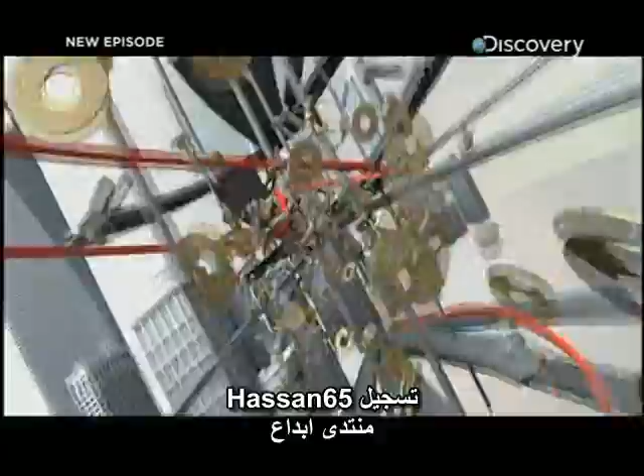In Singapore, a tiny island nation with less than 5 million residents. In fact, the entire country is smaller than all of New York City. Located at the southern tip of the Malay Peninsula in Southeast Asia, the main island of Singapore is both a city and a country, one of the most densely populated in the world.

With no natural resources of its own, Singapore is risking $5.5 billion in hopes of cashing in on the gambling boom exploding across Asia. It's a pretty significant gamble because for Singapore, we've never had gaming before at this scale. We've never had a resort at this scale. Yes. You're taking a kind of a major leap. Yes, it's certainly a transformational project for Singapore. Where you hope to actually not just double, but triple the tourism receipts. That's big.

The centerpiece of this giant transformation, the Marina Bay Sands. One of the biggest and most expensive casino complexes in the world. Unlike any hotel and casino ever built. Rather than just being kind of a traditional hotel and casino that we might find in Vegas, instead, we have a museum, you have theaters, you have retail, you have a casino, massive convention center, 3 incredible hotels, and all of that capped by the first ever Sky Park. That is absolutely right. The Sky Park on the very top will become the icon of Singapore, we think.

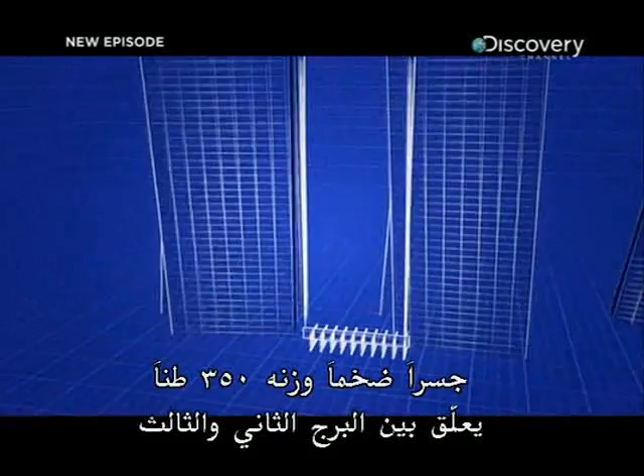The biggest challenge for builders, lifting 7,000 tons of steel, which is more than the main span of the Brooklyn Bridge, on top of 3 650-foot-tall buildings. To get it up there, the team divided the structure into 14 large but more manageable segments. 6 form the bridges connecting the towers, and the other 8 make up the observation deck, which sticks out 218 feet from the end. And right now, crews are about to lift the second-to-last bridge segment, a massive 350-ton piece that will hang between towers 2 and 3.

It's a little after 7 p.m., and on most job sites, it'd be quitting time, right? Folks would be going home. But here in Singapore, we're about to begin one of the most critical lifts in the entire project. That bridge segment right there, an over 350-ton chunk of steel, is about to get lifted up over 650 feet in the air.

In principle, this sounds crazy, right? Yes. We're actually taking a bridge, lifting it up, and putting it on top of 2 skyscrapers. Yes. This has never been done. Never done. So, you got to be a little bit nervous to get this thing up. Oh, definitely. Yeah. We have to get it right.

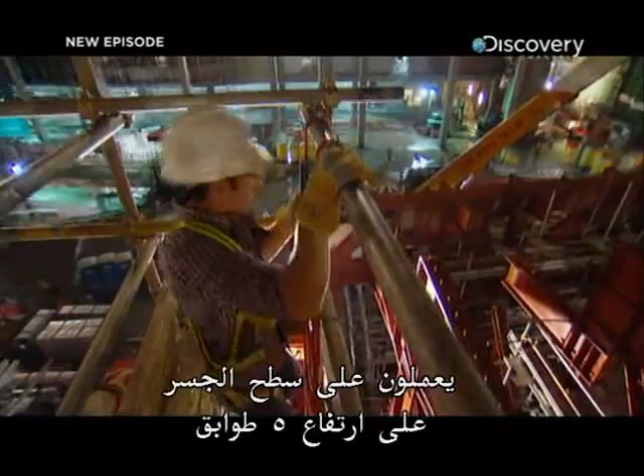Lifting this piece will take some of the strongest hoisting cables ever designed. Going up? All right, Solomon, up here? Yep. They get attached to the very top of the segment, 5 stories up. All right. And now, at long last, I'm on the top of the whole bridge segment, and you really get a sense of its length, because look at that. It spans all the way out between 2 full towers over 150 feet long.

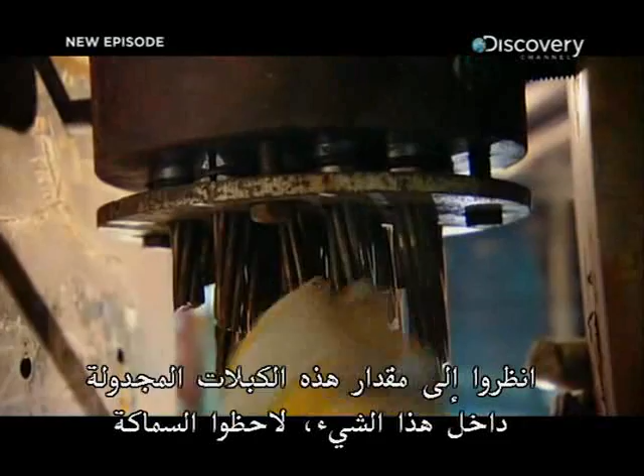And here, this is what it's all about. This is the shackle coming down over 600 feet up. And to really get that point, come here, check this out. Look at the amount of bound cables inside of this thing. Just the density. It's 2 of these shackles, one on this side, one on that side. We're gonna lift up over 350 tons of steel.

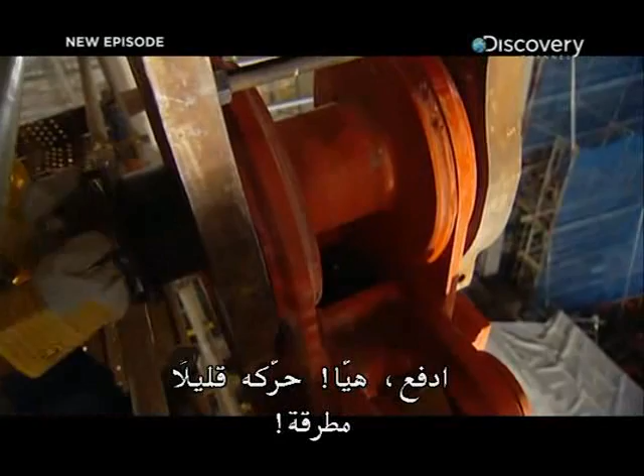All right, you call the man upstairs. An operator from the top of the Sky Park lowers the shackle down. Here she comes, here it is, here it is. Okay, 960 mm. It has to line up within 1/10 of an inch for this 150-pound anchor pin to fit through. Oh, no. Stuck. Push. Fight. Come on, shake it a little bit. Hammer. Give it to me, Poppy. You ready? Here I come.

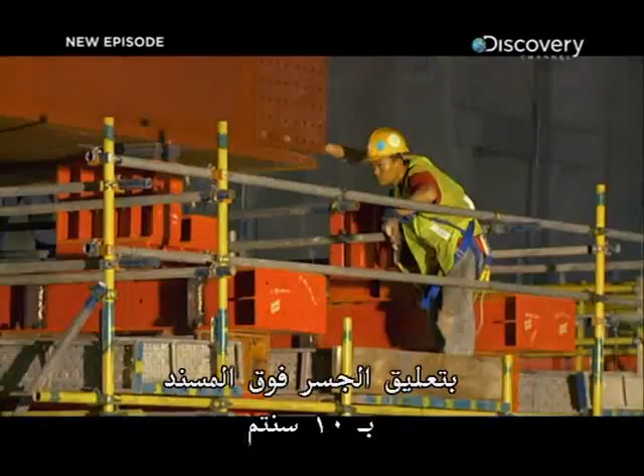Once the pins are pounded into place and the shackles are connected, there is one final step to make sure that the load is secure. Woo! Overnight, crews test the connections for 12 hours by hanging the segment just 4 inches above the support. If everything looks good, it is ready to go up.

Coming up, a one-of-a-kind solution to fight Singapore's intense sun puts up a fight of its own. Whoa. Hang on. I'm gonna pull you right outside of the basket.

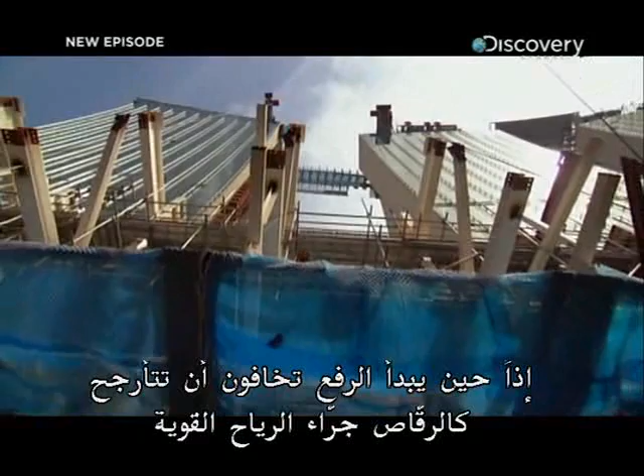Okay, Soliman, she's floating. Yes. 4 inches off the ground. Ready for the lift? Yes. How's the wind? If you can see, it is swinging. And if it swings, it might hit the building. So when the lift begins, the concern is in a strong wind, like a pendulum, it could move and actually hit the building. Yes. It's that close to the building? It is very close to the building.

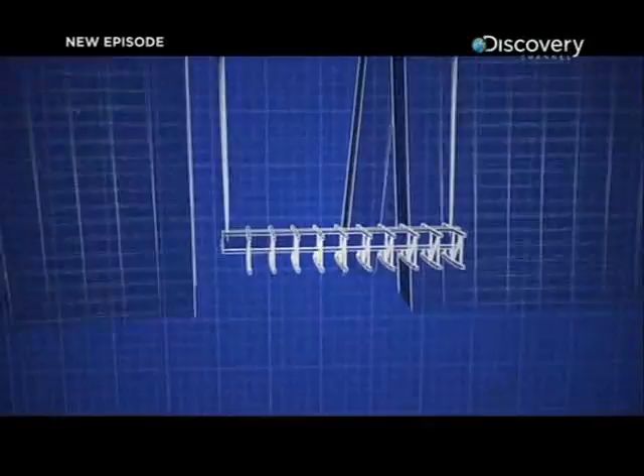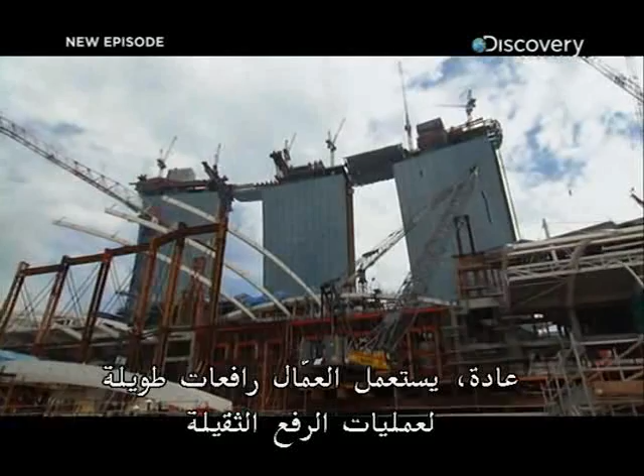Because of the curvature of the towers, this piece must pass within 10 feet of 2 glass skyscrapers on its way up. Any wind over 5 miles per hour is enough to call off the lift. So are we good? Are we ready? Yeah, good. So it's now okay to go. Okay. Typically, crews would use tower cranes for heavy lifts, but this segment far exceeds their capacity. So instead, engineers are borrowing the technology from a different kind of construction: bridge building.

Even the most powerful tower crane can lift about 20 tons. This thing weighs over 360, not an option. So they went with something called a strand jack. And to understand how it works, imagine 2 hands or clamps holding a rope. One hand locks the rope, the other brings the rope up, grabs the rope, goes back for more, brings up more rope, and so on and so forth.

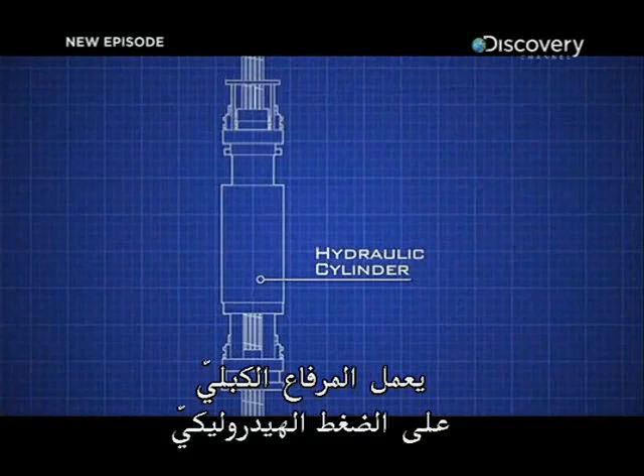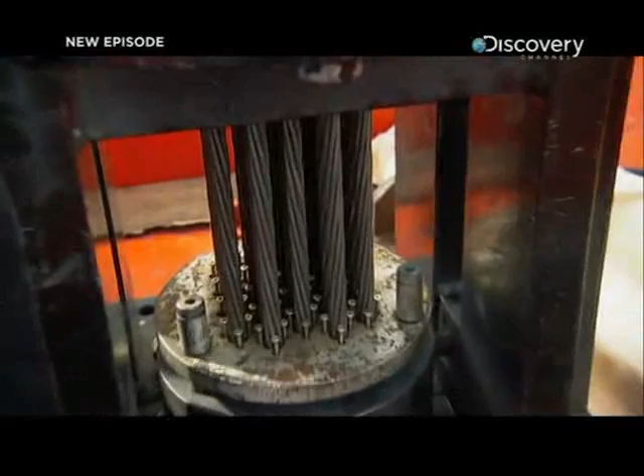Strand jacks work on simple hydraulics. A bundle of 22 half-inch diameter cables passes through 2 clamps. The top clamp grips the strands and moves up almost 2 feet. Then the bottom clamp locks the cables in place while the top moves back down for the next pull-up. It takes 2 enormous strand jacks to lift this segment, one on each tower. Combined, they could lift the Statue of Liberty. It's the first time that this technology has been used to make lifts this heavy from the top of a skyscraper.

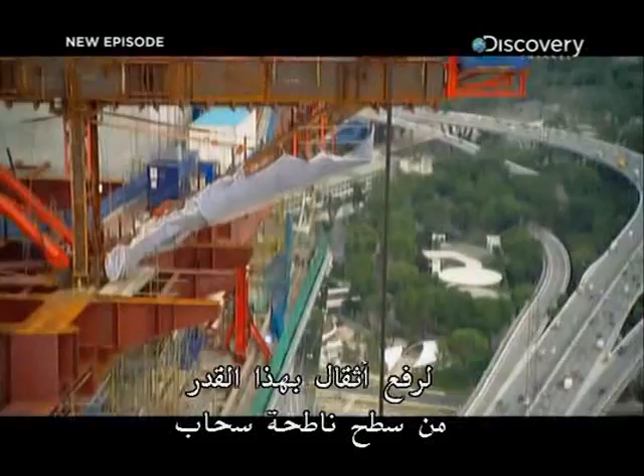Tony? Danny. Welcome, Danny. Good to meet you. Good to meet you.

Tony, where am I standing right now? Well, you're on the Sky Park. So this is kind of where the action is. This is where the pool is. Yep. Right where we are now is the second swimming pool. We're actually in the pool right now. We're in the pool. This is the view from the pool. Oh my God. People will be able to swim out to the edge of the pool. Yep. And literally, there'll be no edge, right? It'll be an infinity edge looking out over Singapore. Wow. It's pretty spectacular. That is amazing.

And what's making all of this happen is this really just nasty looking beam. That's right. So this enormous frame is supporting the strand jacking units. Now, can we actually head up top to the strand jack? Yeah, we can. Let's go this way. The strand jack sits on a temporary support structure that extends 30 feet out from the side of the tower.

So Tony, where we're walking right now, we're actually leaving the skyscraper below us and now heading out. We've just walked off the edge of the building. Beyond. So we're now standing perched out. There's no more skyscraper below us right now. There's no building below us.

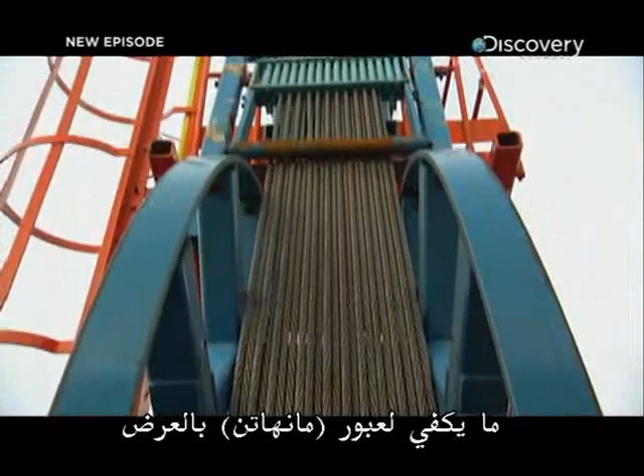It's awkward. It takes almost 30,000 feet of cables to raise the segment, enough to cross the width of Manhattan. And if any of them get tangled, workers cannot lower the piece back down. So one of the most critical jobs on the site falls to the cable manning crew here at the highest point of the Sky Park.

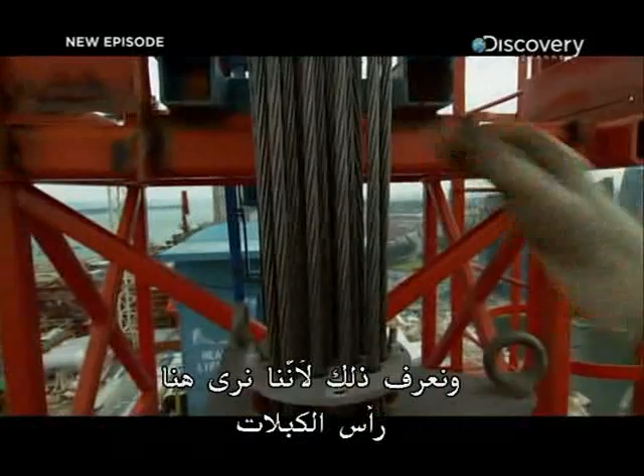Okay, so I am now standing at the very top of the strand jack. And you know that because right here, this is it. This is the top of the cables. And what we're about to do, every 30 strokes, they stop everything, clamp the lift, and spray some lubricant inside to make sure everything moves real freely. Unfortunately, I'm getting tasked with that role right now, so what do you got, some WD-40 we're doing this with? Look at this guy. Why is this the most low-tech thing in the world?

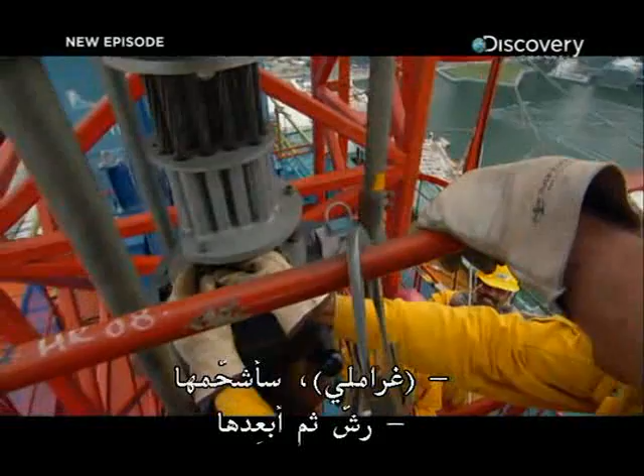Okay, so now what we've done is we've taken the collar off, we've lowered the jack down. Now we've exposed the cables to give us good access for some good greasing. Okay, Gramley, how do you grease it up? Spray and pull out. Put in, spray, pull out. Go in, spray, pull out.

You know, it's sort of humbling to have to climb up to this point, to have that behind you, to have to take a spray can like this, stick in, spray, pull out. Stick in, spray, pull out. Go in. These guys have to grease these cables once every hour for the entire night to get this segment up the final 500 feet to the very top of the sky park.

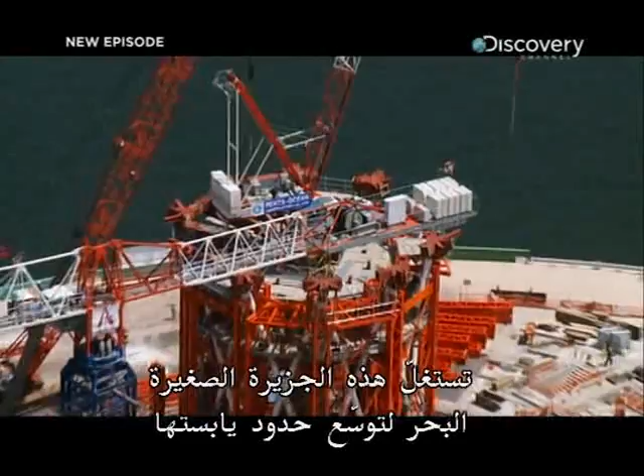Singapore is just 14 miles long. And with literally nowhere else to expand, this tiny island is increasing its footprint by actually filling in the sea, creating almost 1,000 acres of land on which to build an entirely new downtown.

So tell me something. If I was standing here 5 years ago, what would I have seen there? Well, 5 years ago, you wouldn't see the floating gallery, you wouldn't see the wheel, you wouldn't see Marina Bay Sands, neither would you see the financial center. So this is a radically different skyline in just 5 years' time.

Yes. Singapore's evolution involved 30 years of land reclamation, followed by 5 years of construction, all culminating with the Marina Bay Sands. So 5 years ago, this would have been called the old downtown of Singapore. Yep. And now with the Marina Bay Sands completed, this becomes the new downtown. Yes, absolutely.

The Marina Bay Sands' 3 hotel towers will offer guests phenomenal views of Singapore's new downtown. But they also had to be a stunning centerpiece for the city's redevelopment. So, to define their curved silhouette, the architect clad the tower facades with 1,900 glass fins, which also perform a key functional role for the building.

The western face of the towers gets the most intense afternoon sun, so when the light hits the fins, they actually deflect the sun's rays, casting a shadow that reduces the heat on the hotel rooms by 20%, while still enabling clear views of the bay. But this distinctive design feature is also one of the most difficult to install.

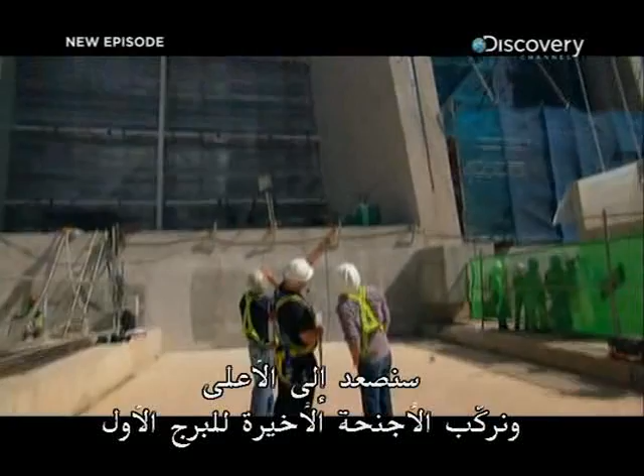We're actually going up to the top. Basically, we're going to install the last fins to Tower 1. And these fins are actually hanging perpendicular from the facade of the building. That's correct. Each fin is 10 feet tall and weighs 400 pounds. They're hung in straight vertical lines, protruding up to 4 feet from the side of the tower.

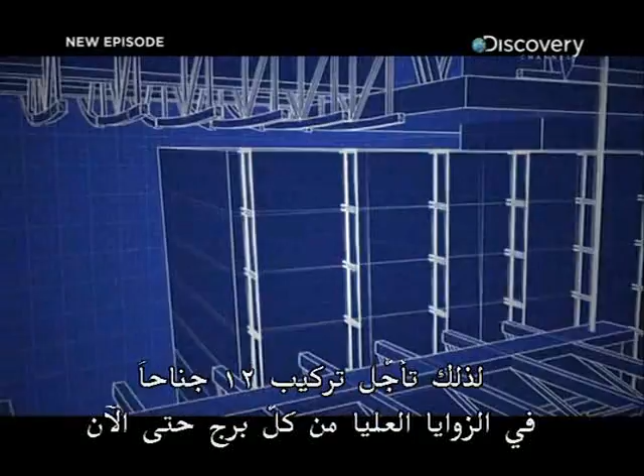Because the facade actually curves outward 5 degrees at the top, there would not be enough clearance for the Sky Park lift to pass by. So 12 fins in the upper corners of each tower were left off until now. So this is it. We are closing up the curtain wall of Tower 1. Yes. Big milestone. Big milestone.

All right. Take me over to my maker. Let's do this. Okay. No problem. Lead the way.

Terry's crew installed the fins from a 6-foot-long gondola hanging off the side of the building. Okay. We doing? All right. You gotta be kidding me. It's basically the size of a bathtub, swinging from 2 sets of 650-foot-long cables tied to the tower. Show me the safety, please. It's so precarious that I'm going to be tied to a separate cable in case the main cable fails.

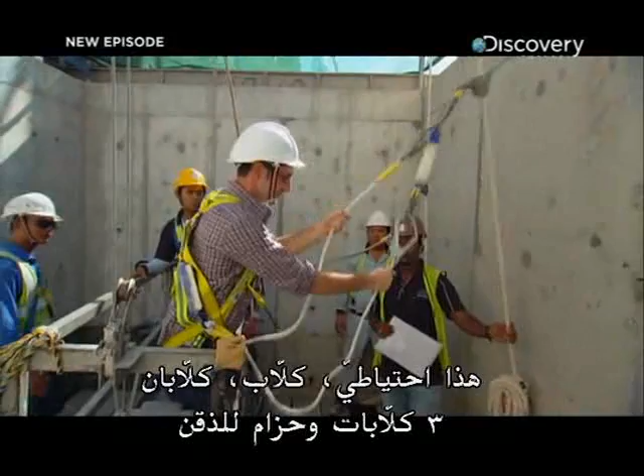Okay. Thing is on. This goes up. That's in the case of dying. 1 beaner, 2 beaner, 3 'biner, chin strap, pants. I mean, there's really nothing else you need.

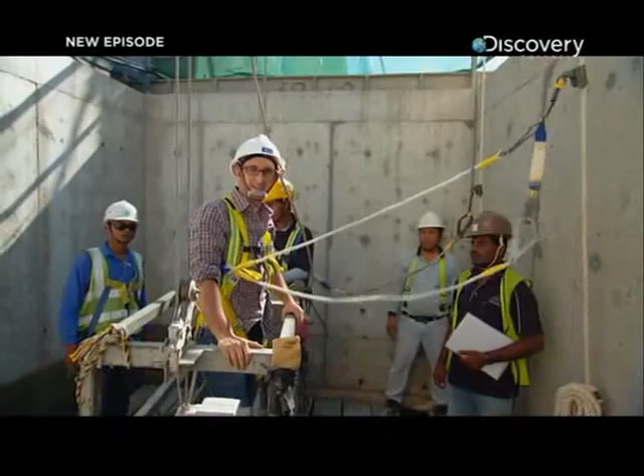Just gonna hang some glass with my boy Jay. 600 feet in the air. Right, man? Give me some skin. Buddy? We're gonna be great. Yeah, here we go.

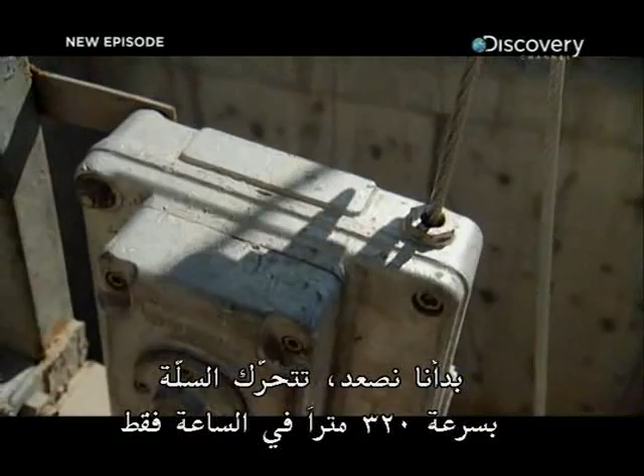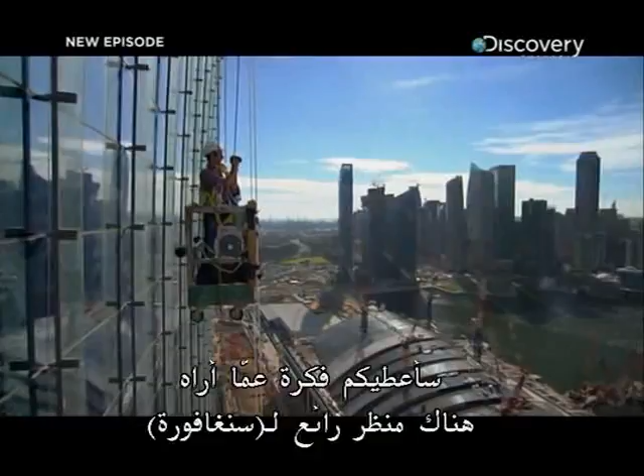The gondola travels at just 0.2 miles per hour. Here I come, moving along, just moving along. So it'll take me more than a half hour to reach the top. Oh my God. Sometimes I don't really feel like I give you exactly what's going on for me right now, so I want to give you just a little taste of what I'm seeing. There is a fantastic view of Singapore. There is Jay, my chatty friend, and there is not a good situation.

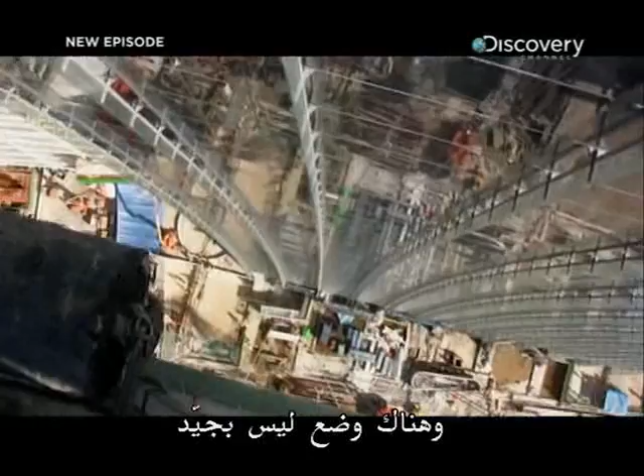All right, we're almost near the top, and you can tell because the building is beginning to bend back on itself and get closer to me. Right there, check it out, we're about 80 feet from the top of the building, and if you look up, you can actually see the missing glass panels. And as I approach the top of the skyscraper, they're prepping the glass. There she is. Oh, the wind is really moving up here.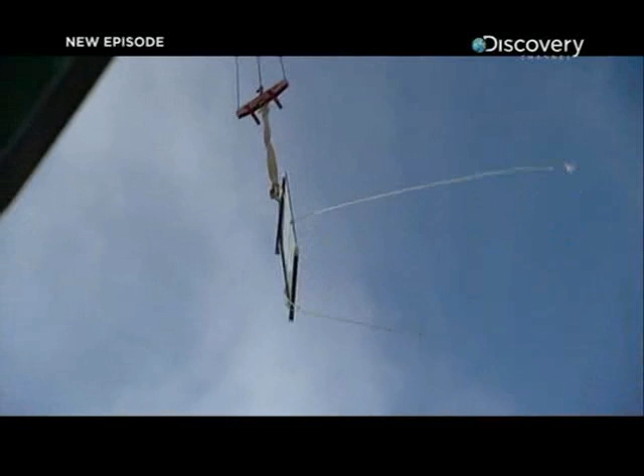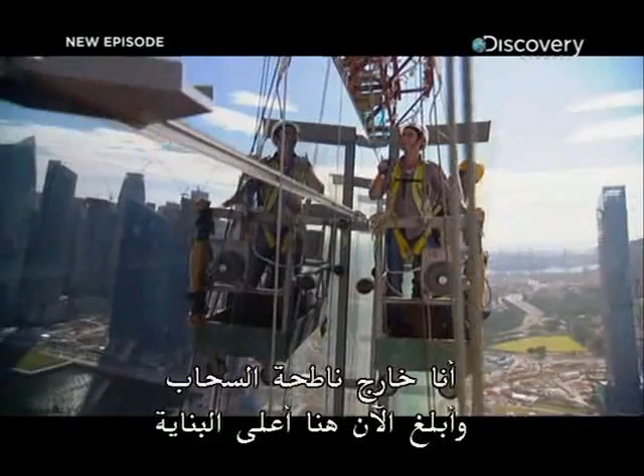That looks safe. Hey, fellas! How are you? Okay. Nice weather, huh? Okay, this is something you don't see every day. I'm outside a skyscraper, and right here, right now, I am touching the top of the building. We are on top of the skyscraper. All right, who's ready to install some fins?

Each fin is a custom-built pane of solid glass. I've got the line. Hang on. Whoa. On a calm day, they are extremely difficult to manage. The wind is blowing this thing out. Give me a hand. But on a day with even a light wind, the task is almost impossible. Hang on. It can pull you right outside of the basket. Hang on. Give me some help. But I'm not kidding, every time you get a little gust of wind, I can feel my feet getting pulled a little bit. There she is, slowing down.

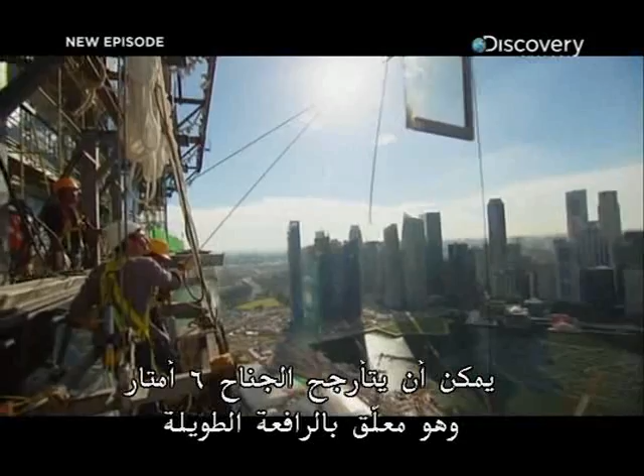It's basically like a big double laminated glass sail. If the wind catches it, it moves. Okay, let it come down a little bit more. The fin can swing up to 20 feet while attached to the tower crane. Coming this way. Okay. Watch out. Someone help him. That's just too dangerous for the final installation.

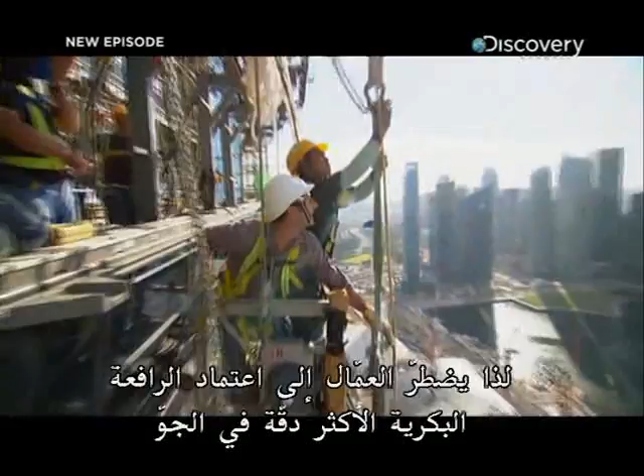So the team has to transfer it to a more precise chain block mid-air. Whoa. Hold that side, please. All right. So this is it. What we're doing right now is essentially taking the load from the crane and transferring it to that chain block. Are we in? Okay, I think we're set.

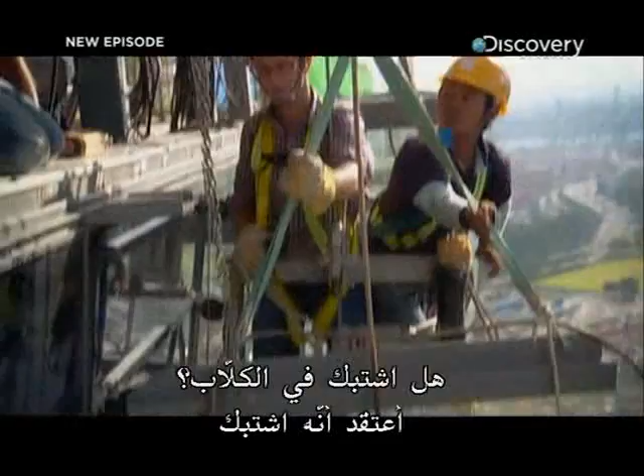This is another one of these moments in my life where I say to myself as an architect, did you really need the fins? Did you have to have fins? Building would have been fine, you know?

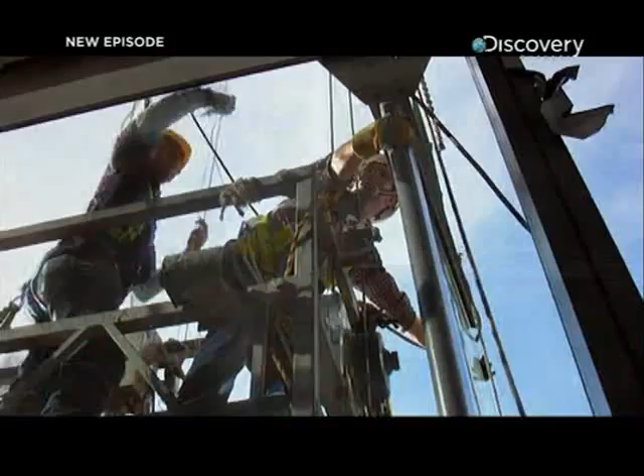Okay, gondola down. Yep. The fins are designed to clip into each other at the bottom. Need you now, Jay. But here, at the very top connection on the highest fin, it gets locked to the building with bolts. Oh boy, this is gonna be a nasty one. Okay, Jay. 4 bolts. Give me your thoughts. 1, 2, 3, 4. Are we good?

Okay. Are we good? Come here. Bring it in. I need some. Come on. Give me it. There it is. Okay. That's right. Whew. 4 bolts, locked in, lined up. We, Jay, are done. Can we go home? Home. That much he understands. Let's get out of here.

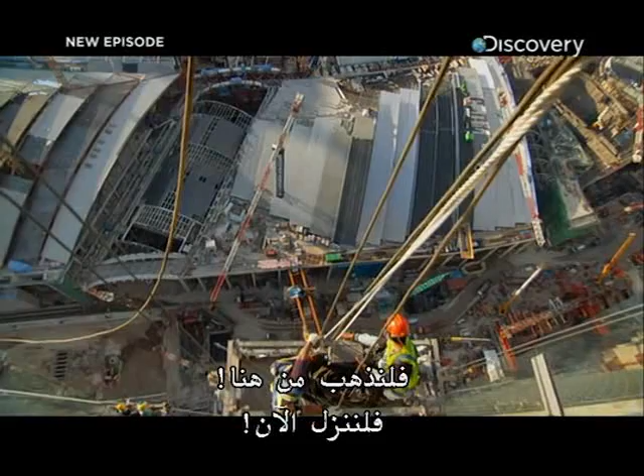Okay, let's go down. With the last fin installed, this facade is transformed into a giant solar shield that will still provide great views of the surrounding bay.

Up next, building one of the longest and highest cantilevers in the world, jutting out more than 200 feet over nothing. Oh my God.

Singapore's new Sky Park is the first of its kind. A steel structure longer than an aircraft carrier, on top of 3 skyscrapers taller than the Seattle Space Needle. And on the northern end, the architect took this innovation one step further, creating the longest cantilevered observation deck in the world. It's the biggest and heaviest section of the Sky Park, and it hangs out 200 feet over thin air.

When it's done, the Sky Park is going to look to the eye like one 1,100-foot-long continuous element. But the reality is, it's actually made up of 2 very different structural conditions. Bridges on the one hand, and something called a cantilever on the other. Spanning between towers 1 and 2, and towers 2 and 3 are 2 bridges, basically acting like tabletops. The force goes from the bridge, transfers into the towers, and down something called shear walls into the foundation.

Now, the cantilever is a different story. A cantilever, by definition, is a load supported on only one side. So what you have here is a 218-foot-long span, almost like a diving board, perched out over nothing. Intuitively, that load wants to just twist off the building. So to keep it down, they've put not one, but two 700-ton backspans holding down the cantilever. The two backspans weigh as much as a fully loaded freight train, but that weight is critical to balancing out the cantilever, which will jut out longer than a 747 from the end of Tower 3.

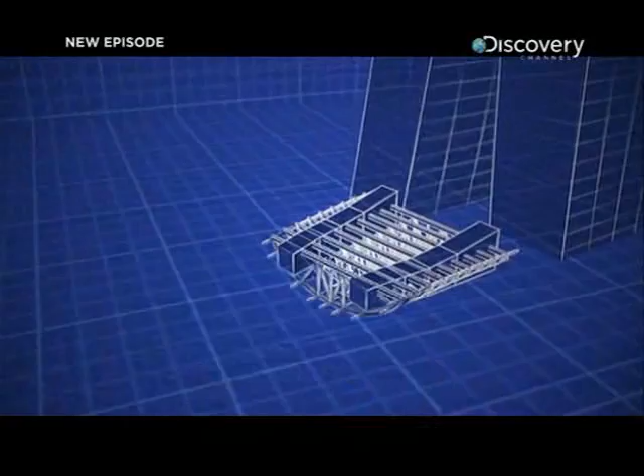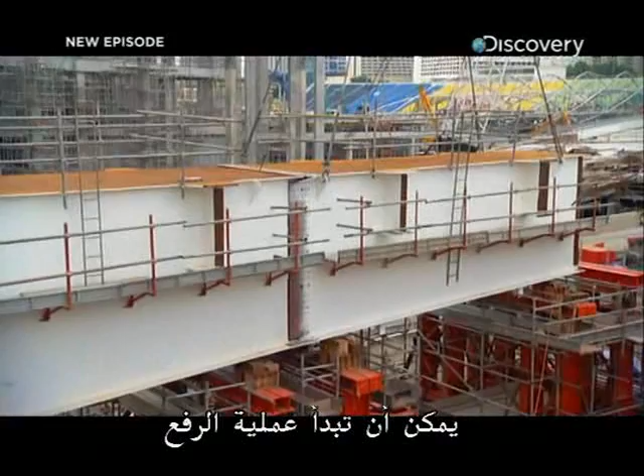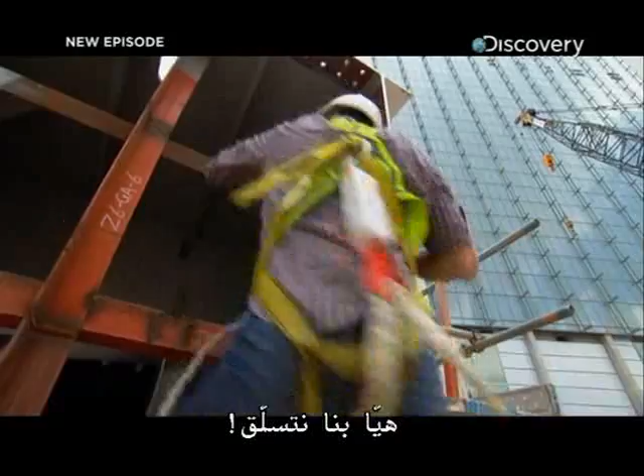So these pieces behind me represent the very final pieces of the cantilever to be assembled here on the ground. So once we get this and this bolted onto that massive cantilever, the lifts can begin. So the crane's now sending the shackles up. We're going to go on top of the piece to connect it. The piece we're attaching today is 12 feet tall. Come on, jungle gym style, baby. And it weighs 30 tons, as much as 2 Mack trucks.

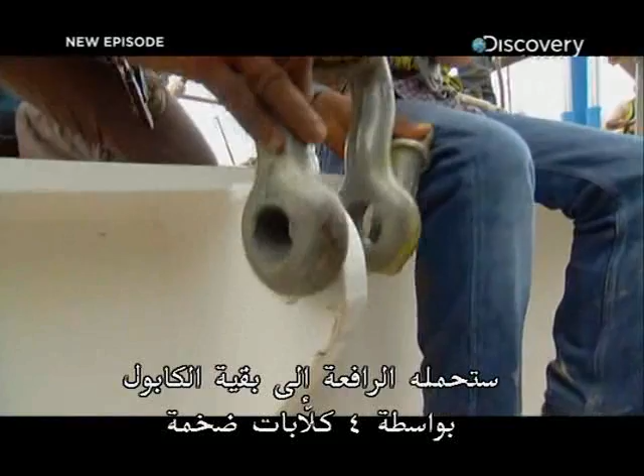A crane will lift it over to the rest of the cantilever using 4 extra-large shackles. So Viram's now tightening up this shackle. So shackle number 1, 2, 3, and 4 are all connected. The next step is to take the piece that I'm standing on, lift it up, and extend that cantilever another 50 feet.

You ready? Knuckles? Knuckles! All right. You ready, Knuckle Man? Knuckle Monster, you got it. Nux Magoo, come over here for that. Bang! We are ready to go. Okay, I'm ready.

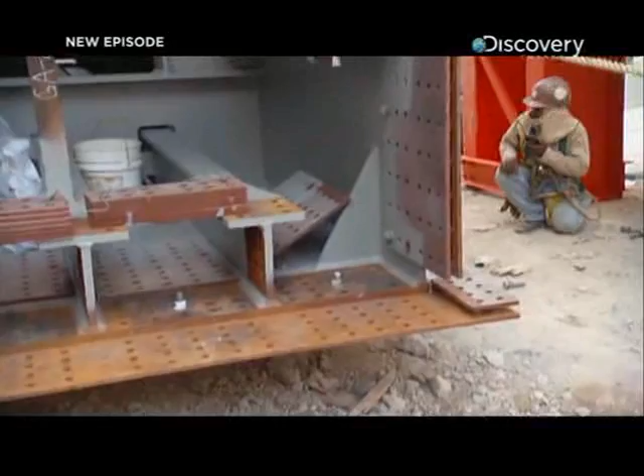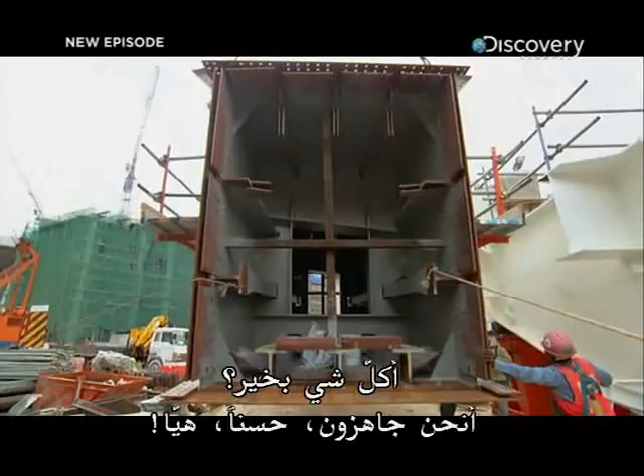So what they've done is they've just put a bit of tension in the line, lift the piece just off the ground to make sure the shackles look nice, and they know where the center of gravity is. So are we good? Are we ready? Yeah. All right, let's go. She's off. Out of our hands. Now the crane's got her. She's gonna swing her all the way around this way. What's really worth noting is as you look at this thing, this massive floating piece of steel, it's but a small fraction of the entire cantilever that's going up there.

Even with 1.5 million pounds of steel, this cantilever will still be susceptible to the problem facing all structures: movement. All buildings, all bridges, even all cantilevers have a natural frequency, meaning they move ever so slightly. Now, if the movement of wind, or the movement of people even, starts to align with that building's movement, it can combine and collaborate and literally shake a building. So when the engineers were designing the cantilever, they had to be concerned with not just how many people stood on the edge, but also how they were moving.

This cantilever has been designed to withstand wind and earthquakes, but its most dangerous threat could come at the hands of a DJ. Yeah, it's thousands of tons of structure up there, so you and me jumping about, it's not going to do very much. But if you get 100, 200 people all jumping up and down at the same frequency, then it can actually excite the cantilever and you actually start to feel it. Right. It would take hundreds of people dancing to the exact same motion. Yes. Like the Macarena. Yes, that's right. And believe it or not, our dynamics engineers have iPods with thousands of songs in them.

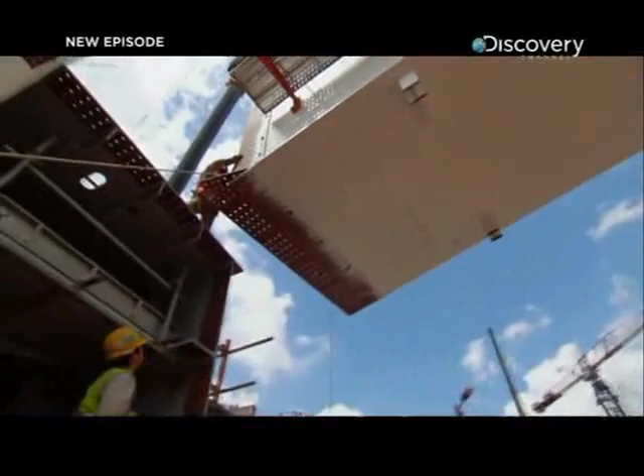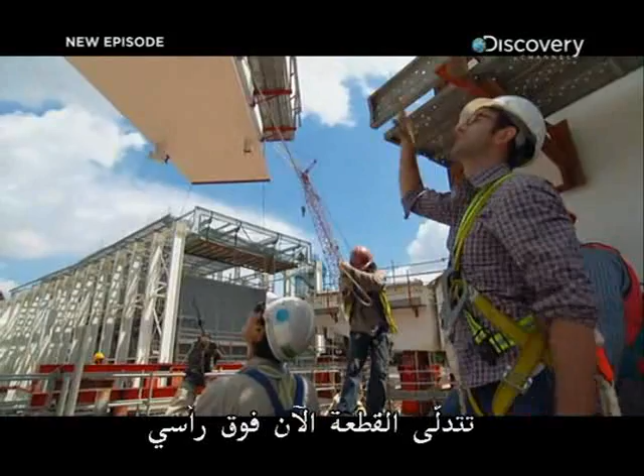Now that the piece has made its way over to the rest of the cantilever, the next major challenge is lining this giant segment up for attachment. So the piece is now literally sitting right on top of my head. And just imagine, on top of this incredible white long piece of steel will soon be a garden, a pool, and a dance party.

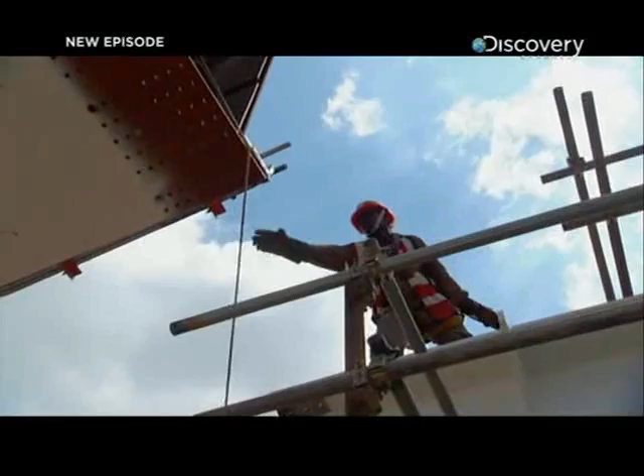Slowly guide it down. Something incredible about lifts like these is that the first 99% happens almost instantly, and now it gets down to the details. Pushing it, pulling it a matter of inches to get all of these holes lined up, to get the bolts in, and take the load off the crane.

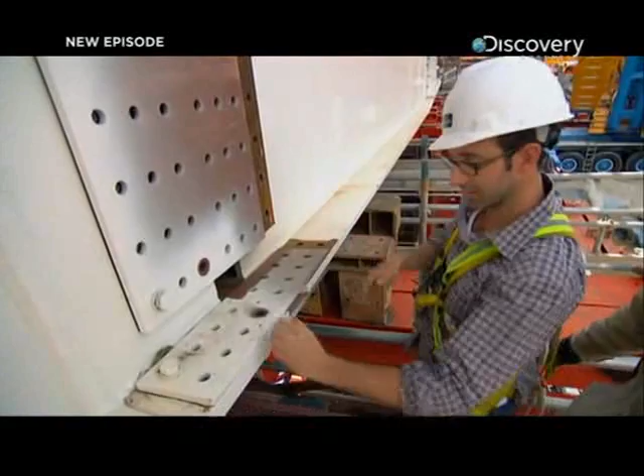Once the piece is in place, the crews have to line up all 1,500 bolt holes. There are so many bolt holes. They'll connect about a third of them here on the ground to make sure everything fits together before liftoff, because there are no second chances once this piece is airborne. So this is how one fits into the next piece right here. You have these two plates on top, and they're sliding over top of the previous cantilever piece.

There it is, it's coming in, it's coming in. Once she's there, we'll put this pin in to lock the piece together so we can release the crane and move on. About 2 inches. Just about there, just about there. Okay? Yeah. Use the hammer. The pin secures this new piece to the rest of the cantilever, so bolting can begin.

I never hit it every time, man. I never do that. Usually I break a finger and knock some steel off the thing and almost break the hammer most of the time. I knocked the crap out of that thing.

Well, as you can see, the piece is in its final location. And now from where I'm standing, I think you can really get what this thing is. An 860-ton, 218-foot-long steel diving board that's going to be perched out over 600 feet in the air.

Singapore is the gateway to Southeast Asia. And for the past century, its economy has depended on its location as one of the world's busiest shipping ports. But this city is in the midst of a makeover. When the Marina Bay Sands opens later this year, Singapore will instantly become one of the largest gaming markets in the world, putting it in the same league as Las Vegas, Atlantic City, and Macau.

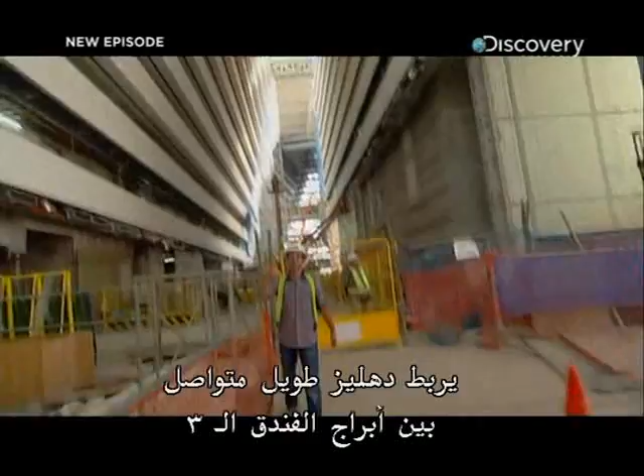The 3 hotel towers are all connected by one long continuous atrium, and that atrium is covered in glass. These massive 9-foot-long panels we're about to take from down here and install right up there. 3,500 individual panels will hang throughout the atrium, transforming this space into one 850-foot-long tube of daylight.

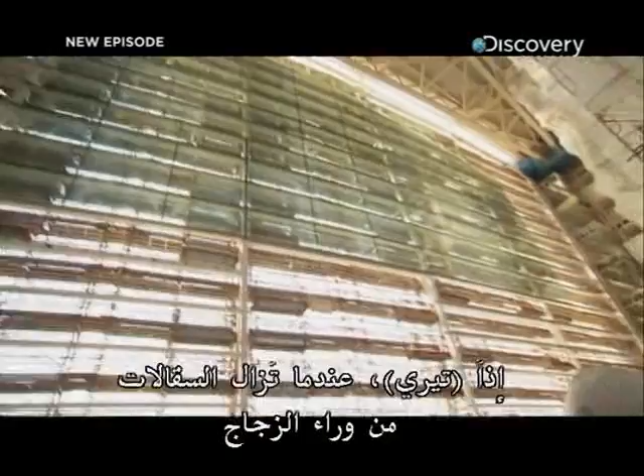So, Terry, once the scaffolding comes down behind that glass, this whole chamber is going to be just awash in light. Yes, that's correct. And these spaces literally link all 3 hotel towers and let you look from one end of the building all the way down to the far end. That's correct. So this is more than just a kind of connective hallway from one hotel to the next. It's not just a corridor. This is not a corridor. No. And if it is, it's probably one of the most spectacular corridors I've ever seen.

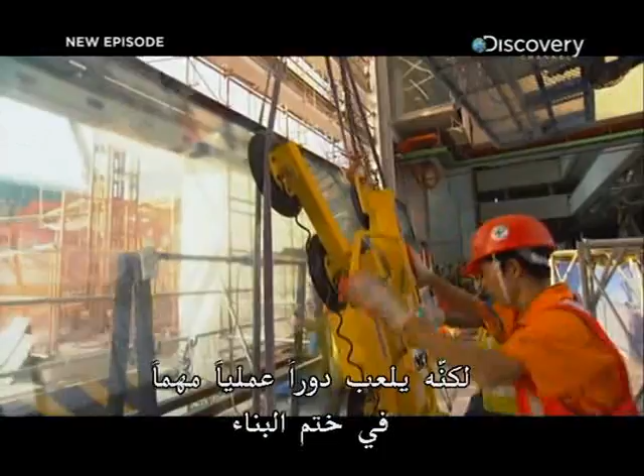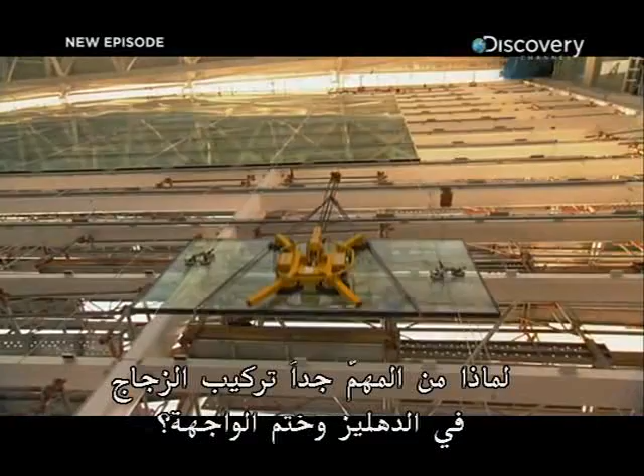Correct. The atrium glass is a key part of the tower design, but it also plays an important functional role in sealing up the building. With hotel guests arriving in just 6 months, the delicate job of hanging all that glass needs to happen quickly. Now, why is it so important to get the glass on the atrium and button up the facade? The vital bit is we actually have to make the building watertight as quickly as possible to enable all the final finishes to commence on the inside. So all the sheetrocking, carpeting, wallpaper, painting, that sort of stuff can't happen if moisture can still penetrate the building.

That's correct, yes. So today we're going to be headed where, up there? We're going up to the top and we'll be installing the top piece of the glass. So we have a big task ahead of us. To finish the atrium on schedule, Terry's team has to install 200 panels a day, about 5 every half hour. So here the guys are, they're just getting the glass ready. A task requiring 8 international teams of glazing specialists.

Hello, sir. I'm Y. Nice to meet you. Nice to meet you. So Y, you're one of the installers? Yes. And you've been installing glass how long? My experience is over 10 years. Your experience is over 10 years. My experience is almost 10 minutes. 10 minutes? So this is going to be a very good team. You and me together. Master and apprentice. Are you ready? I am ready. Let's do this. Let's hang some glass. Why and Danny? Why? Because they said so.

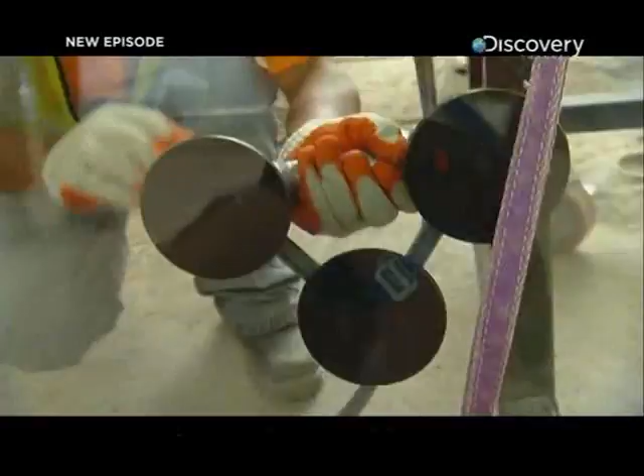Let's do it, Y. We're installing the 3rd highest panel in this section of the atrium, more than 100 feet from the ground. Safety harness? I want you to be safe the whole time. In addition to Y and me, it'll take 10 other workers to install this 550-pound panel. The crew on the ground applies suction cups to the glass and then sends it up on an electric hoist to meet the crew in the air. Here it comes. Check it out.

And waiting for me. Hello, my brothers! You guys ready to rock and roll with myself and Y? Ready? The big team. This is it. This is the Singapore Glass Stallions. All right, here it comes. It's a big piece of glass, huh?

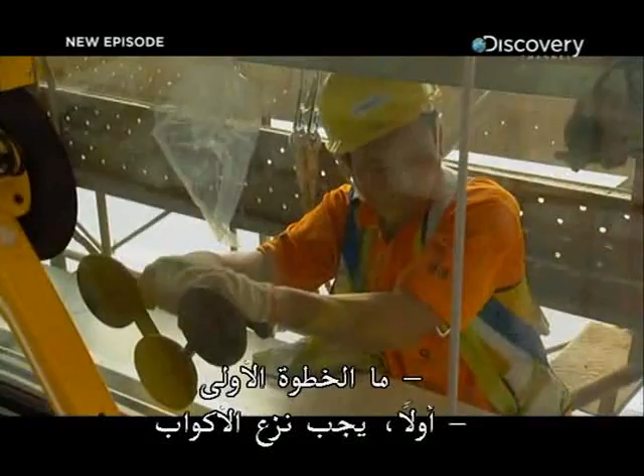Y, what are we doing? What's the first step? The first step is we need to take off the handle. So I'll take off that side, you take off that side? Yeah, take off only the handle. All right, I don't want to drop it, though. Don't want to drop it. The panel is supported by a backup system of smaller suction cups to help guide the piece on its way. Okay, guys. Let go? No, it's too scary. I'm not going to do it. Okay, I did it. And just like the glass fins outside of the towers, we'll finish maneuvering this panel into place with the chain block.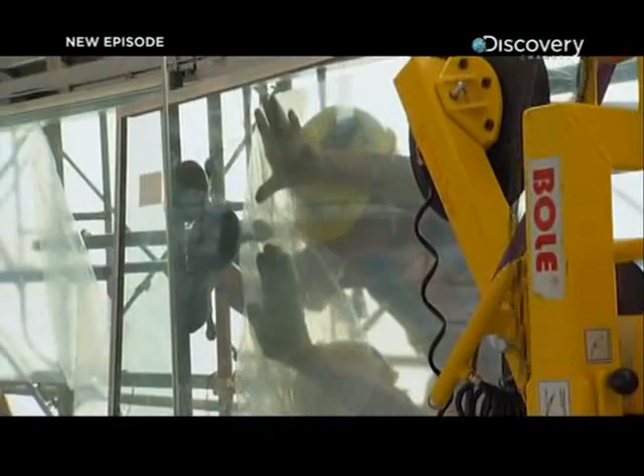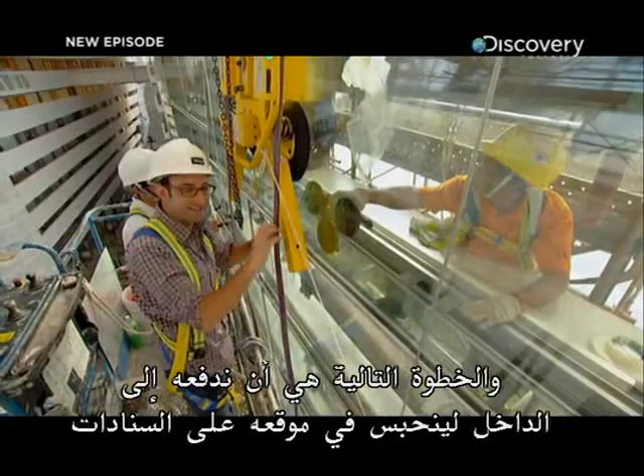Okay, guys. So the chain block has lifted the glass panel to just about the height, as you can see, of the previous panel. So the next step is to push it in and get it locked into place on the brackets. Okay, Wai? Should we bring her in? Yeah. The last one. The interior work for the hotel cannot get started until all the atrium glass is hung and the lobby is watertight.

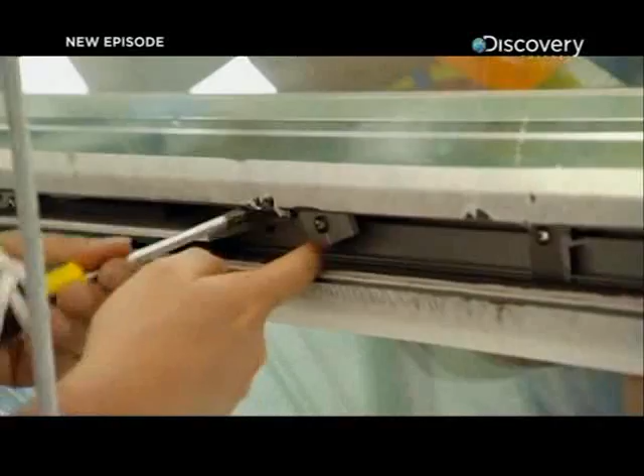I'm pushing, Wai. So to speed up that process, 20 attachment brackets come pre-installed on the atrium wall frame. They sit horizontally so the glass can slide into place. There we go. And then we'll turn them vertically to lock the panel to the building.

Do I need the screwdriver? No, you use the power tools. I'm old school, Wai. Power tools. You make sure all the pressure bars are tight because the hand power is not standard. You haven't seen my hand power, Wai. Tight, yo. Check it, Wai. You don't trust me, check it. You have a look. That's just good stuff.

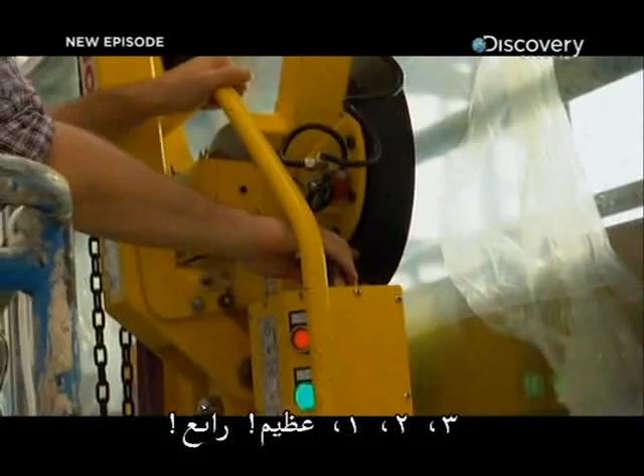Yeah, good. Very good. All right, so all 4 sides are locked into place, and this glass panel is now fully supported by the building. So therefore, Wai, I'm pulling the plug. Suction is coming off. 3, 2, 1. Okay. All right. Very nice. Look at that. Nice, huh?

Very nice. Wai from Malaysia. Yeah. And his team do this 25 times a day. Best partner. And in just 6 months' time, this entire atrium will be covered in glass and shimmering with natural daylight. It's you and me. Go home. Now go home. And by go home, I mean hang glass the rest of the day.

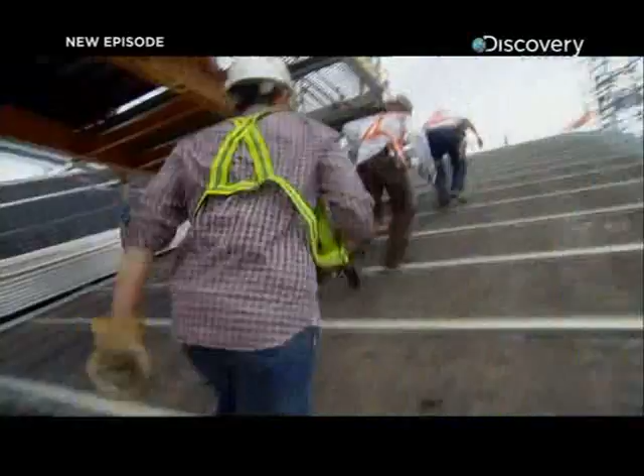Up next, racing to finish one of the largest paint jobs in the world. We're gonna use a brush. Yeah, brush.

After 30 years, Singapore's ambitious downtown redevelopment is nearly complete. Its crown jewel, the $5.5 billion Marina Bay Sands, is due to open in just 6 months. And crews are racing to complete the hotel's complex facade. The glass on the face of the towers is complete, but on the side walls, the concrete remains exposed. So to finish those walls on time, there's another massive job ahead.

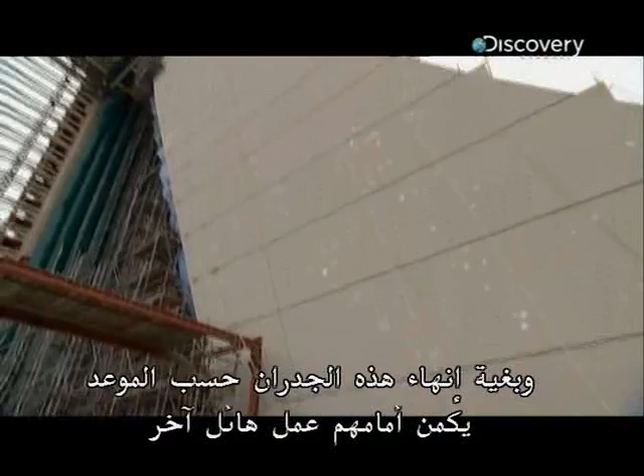When you clad the outside of a skyscraper, typically you cover it in maybe some stone veneer, maybe some glass, or maybe some metal paneling. What you don't do is paint it, right? Because if you've ever painted a fence, every couple of years you have to repaint that fence. But here in Singapore, they're so focused on things being clean, so focused on immaculate maintenance, they're willing to actually paint their buildings. So today, I'm going to do something that you would never see on an American construction site. I'm going to paint a skyscraper.

Muti, I'm Danny. This is going to be one of the single largest paint jobs ever attempted. So I got a bucket of paint, and in order to apply the sophisticated skim coat, the technology we're going to use is a paintbrush. Really, Muti? Yeah, this brush. It's a small brush, yeah? Small brush, one small brush. Right, and obviously you couldn't do a skyscraper with that little brush. That'd be crazy. So instead, I have a roller, which ought to really expedite the process. Painting fast. All right, well, what more do you need? Away we go. Okay.

This wall faces the country's main highway, connecting the airport to downtown. So, Muti, you're okay? Heights, no problem? No problem. And on opening day, with all eyes on Singapore, it's gotta look good.

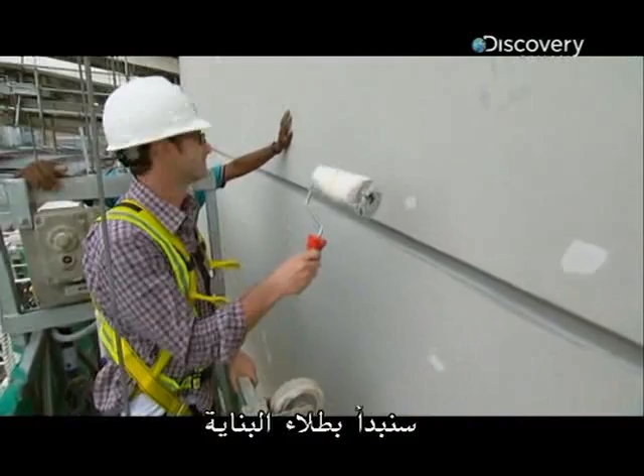So Muti, just go to it, huh? All right. Nice and gray. I like that Muti's looking over like I'm touching up the top of the Sistine Chapel or something. In total, Muti and the rest of the crew will use more than 2,200 gallons of paint. Muti, how's it look? Does it look good? Yeah, very nice, very nice. Good. Muti's loving it. To cover all the tower shear walls in time for opening day.

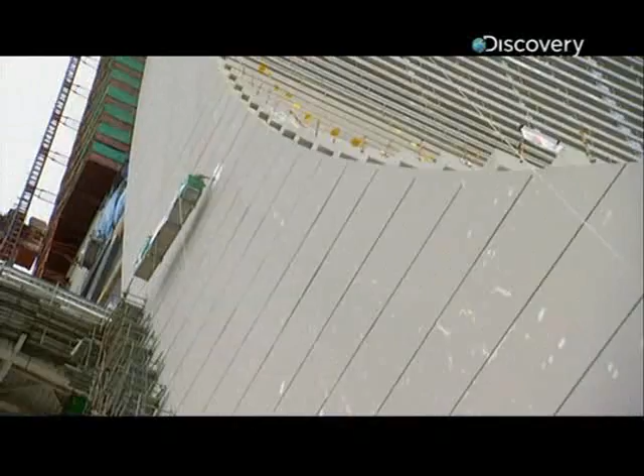And this project cannot afford delays, because every month the casino is not open, developers give up $100 million in lost revenue. So these crews have been running at top speed since day one.

So, John, just to put this in perspective for someone who's not used to seeing a project this size, it would take perhaps another country a project this big, this expensive, this complex, as much as 6+ years to build. Yep. And you guys are on target to complete this in 3 years, half the time. Yeah. And one of the critical aspects of this project at the moment is getting that Sky Park structure up. So getting the superstructure of that Sky Park done is key to closing up this project and finishing this race.

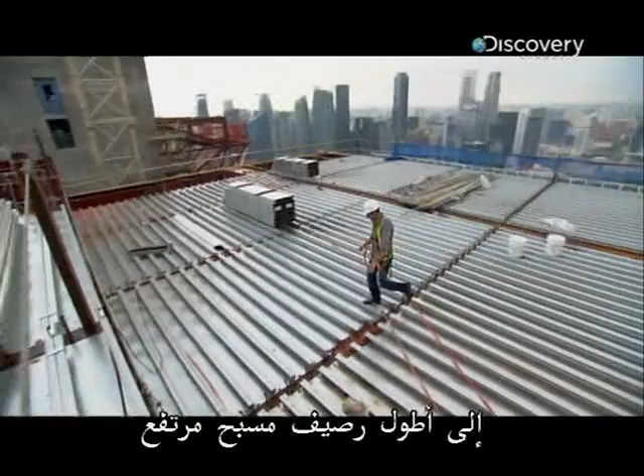Yep. But this is going to be a sprint to the finish, because crews up at the top of the Sky Park have only 6 months left to turn this mess of steel into the world's longest elevated pool deck. This is it. This will be the pool deck, and that will be the pool. But there's a problem. I mean, there's a pretty big problem.

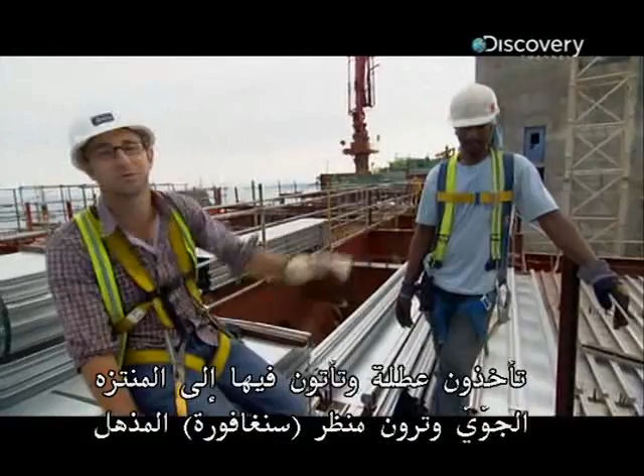You go on vacation, you come to the Sky Park, you see this amazing view of Singapore, and then you fall through a hole to your death. It's not good. Not good fun on the vacation. So Wilson and I are going to cover it with this aluminum decking. Cover the holes? Good. Let's cover the holes, my friend. We're filling in the bridge segments between towers 1 and 2 more than 650 feet up. And there is literally nothing below us but the decking we're about to lay.

Oh, I just got that thing. That thing, I just looked down and I saw a car, and it was so little, and my body was like, wait a minute, what are you doing up there?

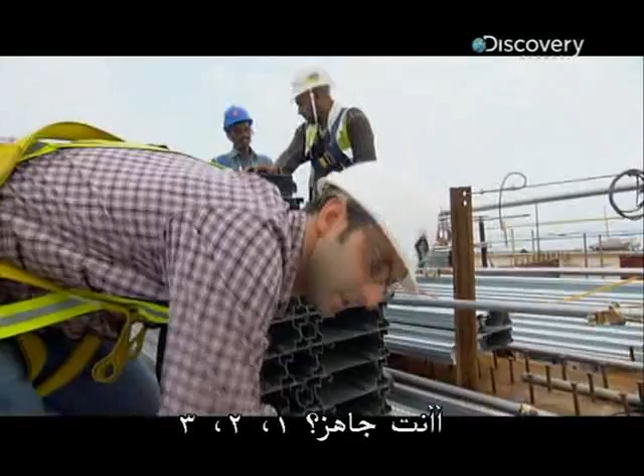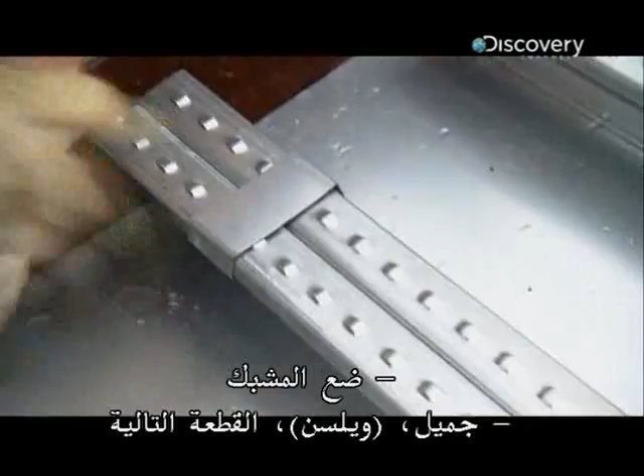All right, Wilson, how do we begin? Step one? Yeah, step one. Okay. You ready? 1, 2, 3. Okay. And slot in. Yep. Pull back. Pull back. Okay. Good. Put the clip on. Nice. Wilson, next piece. Plugging up the hole. Dear God. Okay, letting go.

Woo! With these 10 panels in place, another 125 square foot section of this Sky Park deck is complete. Last piece, huh? Wilson, victory! Wilson and the rest of the crew will have to lay down 300 panels a day in order to have the entire Sky Park ready for opening day.

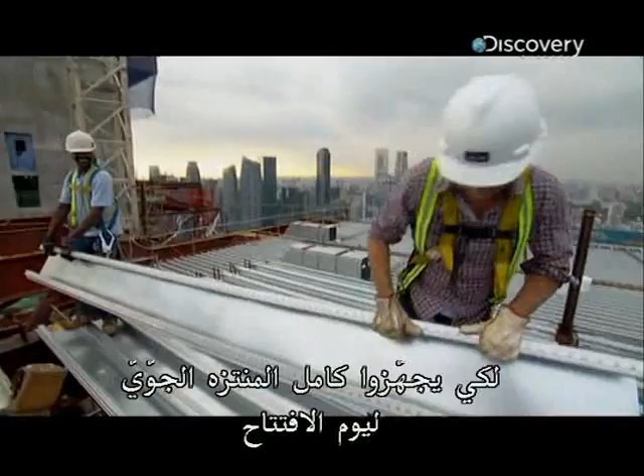Wilson. Yes. When the Sky Park is done, people will be swimming right there, dancing on that cantilever, having dinner in that restaurant. Yes. But we're not done yet, are we? Yeah. Come back in 6 months, check out this Sky Park.

Me and Wilson will be having a cocktail and enjoying this ridiculous, incredible view. You're buying, though, right? Yeah, correct. All right, cool. Wilson's buying, so it's all good.

When the Sky Park is complete and the Marina Bay Sands opens, Singapore will join the ranks of the world's top gaming destinations and fulfill a 3-decade-long quest to reinvent a nation. You know, for me, the moment when a building actually becomes a piece of architecture is when it transcends its function. So what I mean is, think of the Empire State Building. It's not just about the people who work inside of it, but it's really about the spirit of New York City.

The Marina Bay Sands is a project with a hotel and a convention center and a casino. But in reality, the sum is greater than the individual parts. This is a project where an architect, an engineer, an owner, and a government have all come together to literally try and reinvent the face of a nation. And I think if you come back here in about a year's time, that postcard picture you take of Singapore is going to look a lot like that.